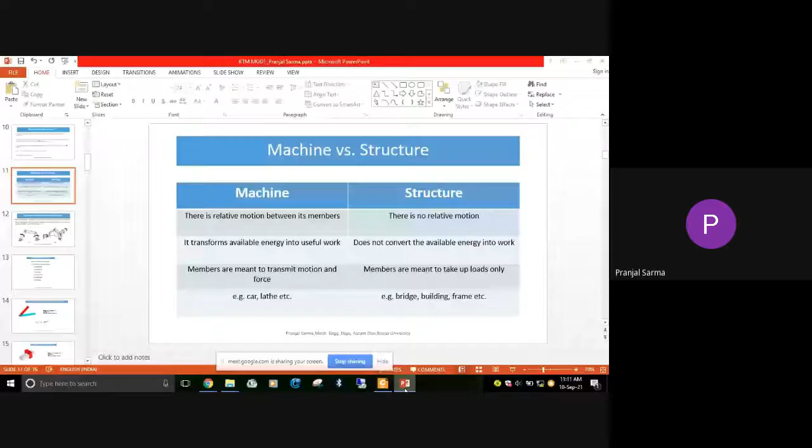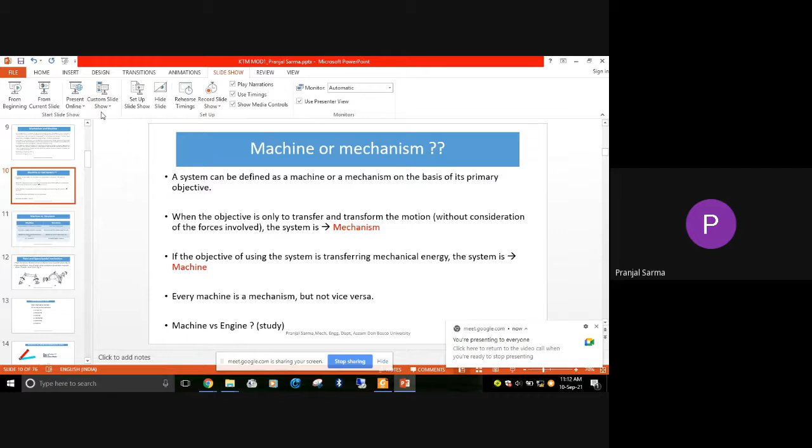So now after that we have also discussed mechanism and machine, and when we will be calling one as mechanism, when we will be designating one as machine. So those things we have discussed, and I told you to go through machine versus engine, and machine versus structure. I believe we have not discussed machine versus engine, so you can consider that as homework.

So now if we discuss machine versus structure, then what happens in the case of machine is there is a kind of relative motion between the members. Those members are what you can consider as links, and they are the main or elementary thing present in a machine, which is comprising of so many mechanisms. So between the members we have relative motion.

And if you consider a structure, in that case there is no relative motion between the members. For example, a structure like a building or bridge. So if you think of the building, this home etc., if the different members are having relative motion, that means it is kind of shaking. So then you can consider what is going to happen there - you will be afraid to stay there.

Similarly, if the bridge itself is kind of rocking, or has relative motion between different members, it will be disastrous. So that is it.

So this machine transforms available energy into certain kind of useful work - all of you already know this. So some motive power or available energy is there, and by the use of this machine we can get some useful work done through it.

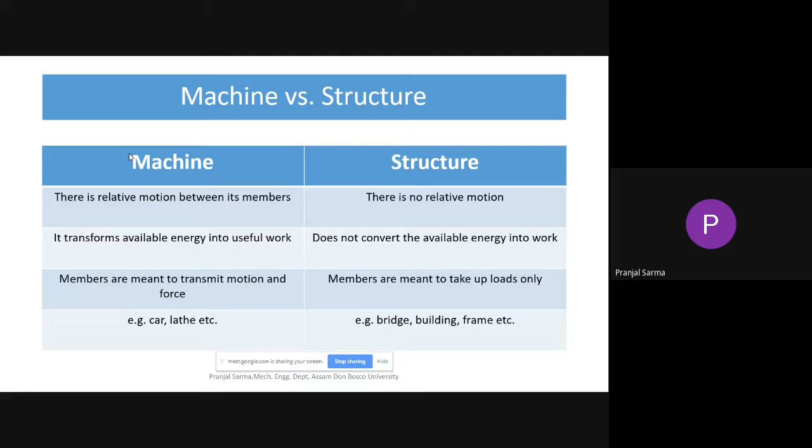As an example you can take machine - a car, or a machine tool like a lathe machine or milling, shaper etc., I consider as examples of machine. And different frames, buildings etc. you can consider as examples of structure.

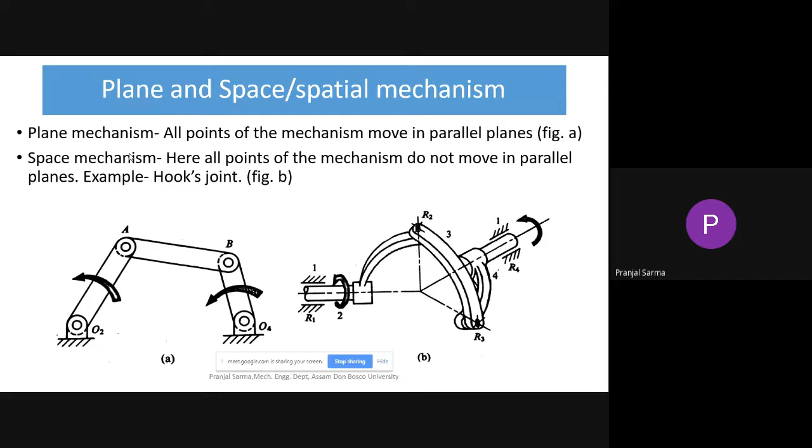So now prior to going to plane mechanism - what is plane mechanism or planar mechanism, or what is space or spatial mechanism - prior to that I'll go through some of the basics of the different terminology which we use while designating any kind of machine, mechanism, etc.

So now all of you by this time already know this mechanism. They are kind of the building blocks for the machine. The machine may comprise of a single or several mechanisms to get a certain useful work done.

And now in the case of mechanism, it is also comprising of so many linked members assembled in such a way that it can give certain relative motion, predictable or constant kind of relative motion between them. So there is a certain degree of freedom involved, and there will be different members linked, or joined together, so as to form that particular arrangement.

So now in that particular case we'll be discussing what is a link, also known as the kinematic link, or the same thing. Or you can say the different pair - what we understand as the pair. So those things we are going to discuss, starting with the initial thing.

So this link, also known as the kinematic link. This word kinematic is also involved sometimes.

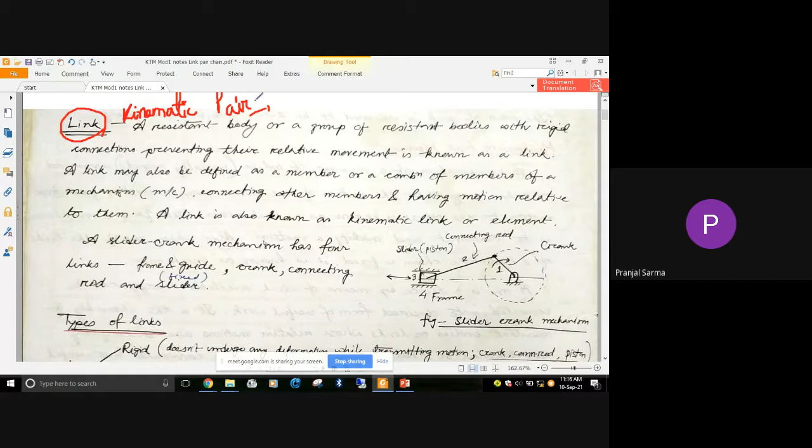Okay, don't worry. So link or kinematic link, then we have got pair. Then the next higher thing is kinematic chain. So they are all like the meaning is similar. Kinematic word if we use or don't use, then ultimately it means the kinematic link only, kinematic pair, kinematic chain only. Even though we only call as link, pair, chain.

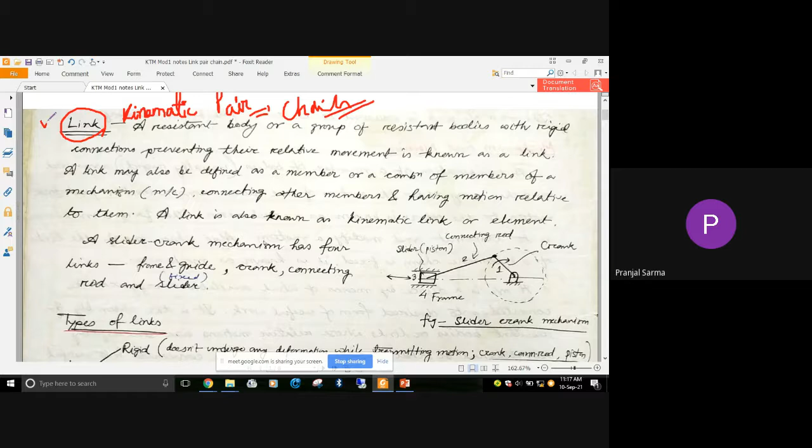So now this link, how can we define it? Basically, this link is a resistant body, or it can be a group of resistant bodies also with rigid connection which prevent their relative motion in between. If it is a group of resistant bodies, then there is no relative motion in between them. And it can also be defined as a member or a combination of members of a certain mechanism.

So you can consider this as the building block for it. And what does it do? It basically connects other members and having relative motion to them. So if we consider two links, it is kind of the members which is going to give you the ultimate thing. This link we also call as kinematic link or element. It is the basic thing that is there in this case.

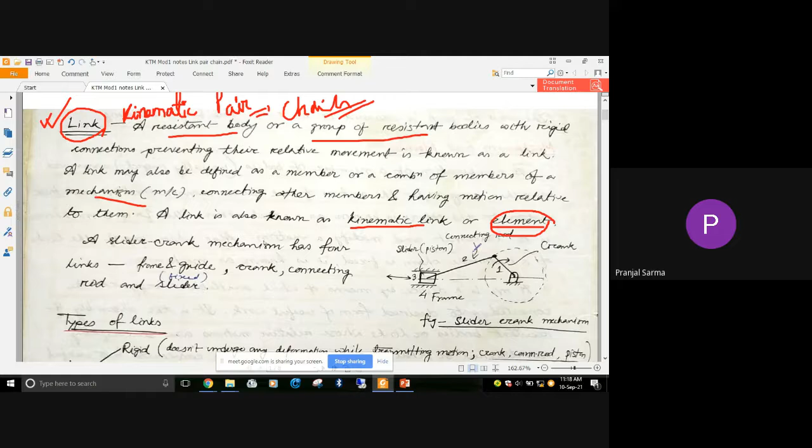So now there is one very important kind of mechanism known as the slider crank mechanism, which will be coming across quite often. With respect to this, I will be showing what are the different links which is there. Prior to going to the kinematic of this slider crank mechanism, I just want to tell you one thing. See, there will be so many mechanisms you will be coming across, and those different mechanisms will have different shape and size. But it can ultimately be broken down to some simple diagram, and those kind of line diagrams we call it as...

Hello, am I audible to all of you?

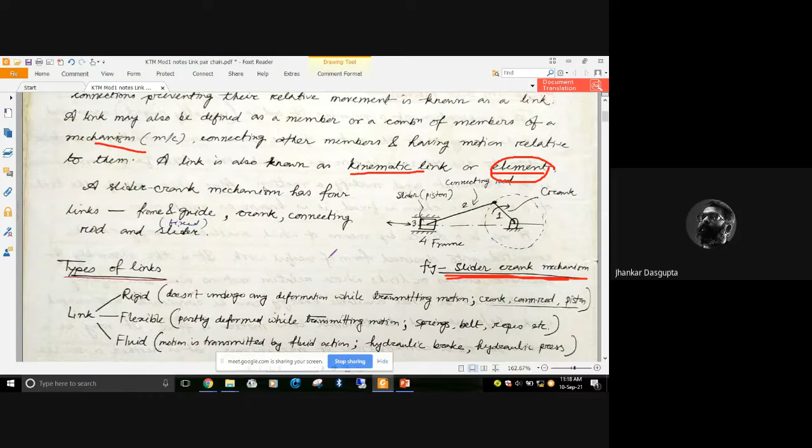Yes, sir. Okay, so those diagrams basically we call it as configuration diagram, or sometimes kinematic diagram also. Sorry, writing in laptop is kind of difficult. Configuration diagram, also known as kinematic diagram.

So what they do basically, those diagrams we use to represent the complex mechanism in a simple way. Now here in this particular case, whatever you have, you can see here in this right hand side. So this is the configuration diagram or kinematic diagram, sometimes even known as the line diagram. We don't generally use the word line diagram, but configuration diagram or kinematic diagram is the proper word to use.

This configuration diagram is for the slider crank mechanism. Here we have got four links, four basic elements. So what are those? We have got one link which is known as the crank. We have got this link number 2, which is known as the connecting rod. This connects this particular crank to this particular slider. So this connects it, and this particular link is the connecting rod.

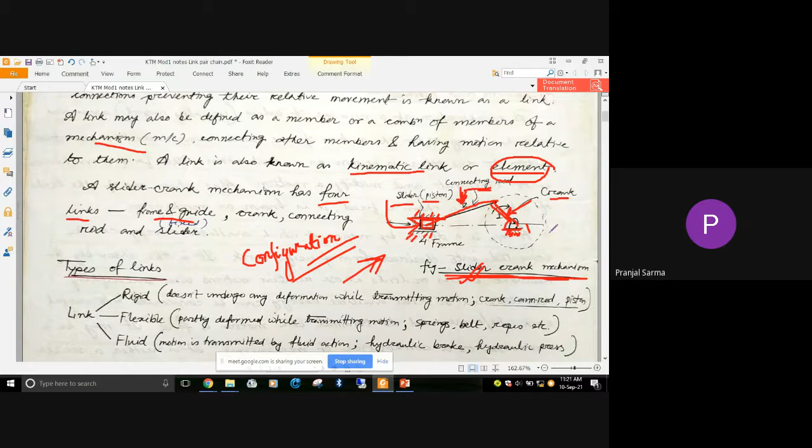So right now up to this much, it is clear what is link. Okay, so just you can respond, no problem.

Link is kind of the elementary thing, just like if you think of making a building, the bricks are the elementary thing. So just like in the case of mechanism, the links are the elementary thing. Now the types of links we can classify in different ways.

One category of classification may be categorizing them as rigid link, flexible link, or fluid link. So how can we define the rigid link? This rigid link will not undergo any kind of deformation while transmitting motion. As already discussed, a mechanism is used for transmitting motion or force from one place to another, that means from one link to another, so there will be certain input portion and certain output portion. If it is a rigid link, it is not going to undergo any kind of deformation while transmitting motion.

Like in the case of the slider crank mechanism as an example, the crank which was the rotating member, the connecting rod which was connecting the crank end to the slider, and similarly the piston, all those were kind of rigid links, so they will not undergo deformation in their shape.

Similarly we can have a flexible link which can undergo partial deformation while transmitting motion. Like if you consider the spring, maybe the belt or the ropes, during its operation the spring, belt, etc. may undergo certain partial deformation, so those will be considered flexible links.

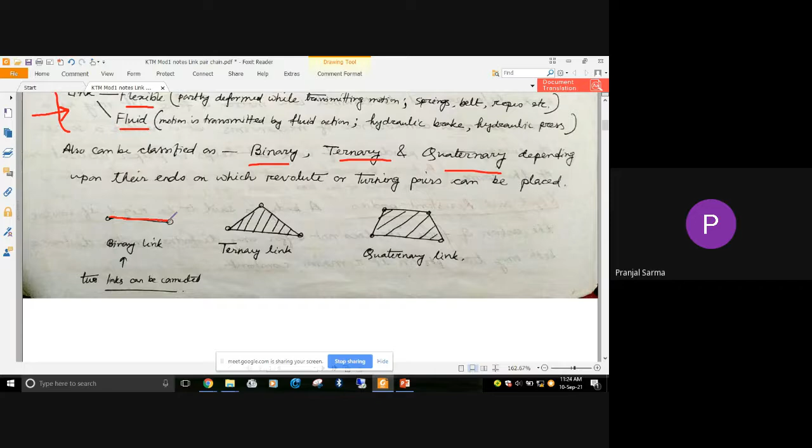Now how can we define binary, ternary, quaternary links? What will be a binary link? In simple terms you can draw it like this. It can have different shapes in actual sense, which I'll show later. This binary link basically has two ends where I can connect some other element, that's why the name is binary. We have got this end and this end where two other links can be connected.

If I join another link here, I can do that, and similarly I'll be able to join another link here also. So this particular link is a binary link. Similarly, if you consider this joint, for this particular link we have got one point here where I can join another link, and similarly one here, so that will be another binary link.

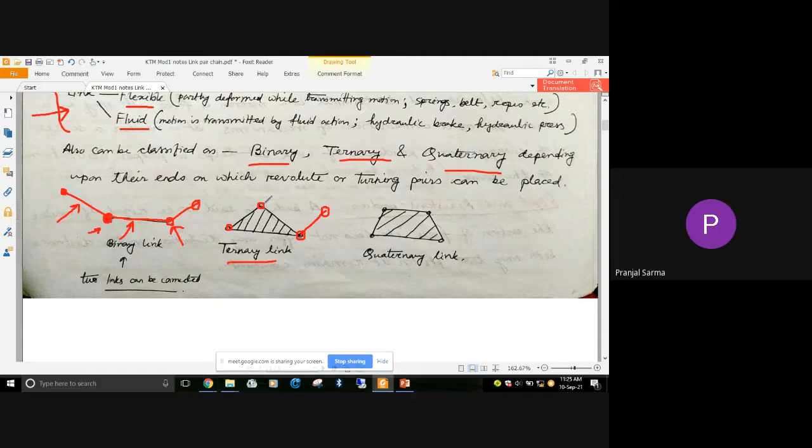Similarly we can have a ternary link. From the name itself we can know, so here I am showing by this circle, and at this point and similarly at this point we can connect some other member. It's possible that I may connect some other ternary, binary, or whatever type of link here. So ultimately there are 1, 2, and 3 possible positions where revolute or turning pairs can be placed.

Similarly, I can have a quaternary link, depending on having 1, 2, 3, 4 number of positions where other links can attach. Now, how can I know that this one is a ternary link or a quaternary link, but not 3 different binary links or 4 different binary links in this case?

How can I be sure? So generally, to designate a ternary or quaternary link, to make the sense that this whole thing is a single entity, we generally mark it by a hatch mark, like this. If I show it like this, automatically it is understood that this is a ternary link. So this one is a binary link.

How is it binary? We have got 2 positions, 2 ends where I can connect to other revolute pairs. Similarly, 3 possible positions for the ternary link. In this case, how many positions are there where turning or revolute pairs can be placed for this case?

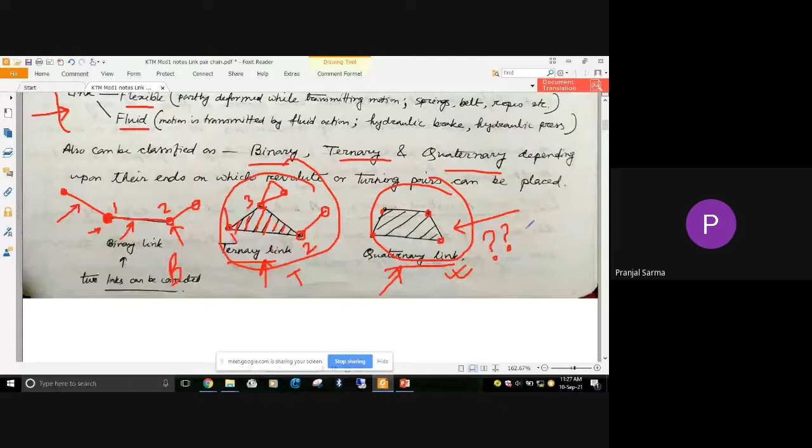Anyone? How many? Who will give me the answer? Don't be afraid to answer, just try. Hello, I hope I am audible.

Yes, sir, so what will be the answer for this quaternary link? How many possible positions are there where I can join other types of links, other pairs, other turning pairs? For this case, we have 1, 2, 3 and 4. Yes, correct, 4.

4 positions. So, to make the sense that it is a single entity, not 4 different binary links, someone may think, okay, I am drawing like this, and because of that it should be like we showed previously in the case of binary. Yes, we drew like this, right, the binary one.

So you should not think that suppose this is 4 different links, suppose 1, 2, 3 and 4. You should not think this is 4 different links that are there. But to make things clear, that it is a single entity, we do this, we show it with hatch marking.

So while drawing configuration diagrams, these are diagrams drawn in simple form, used to describe or draw whatever is the type of mechanism in its simple pictorial way. So while drawing the configuration diagram, if some of the links are shown with hatch marks, then you must understand that this is a single link, not 4 different binary links, but a single link.

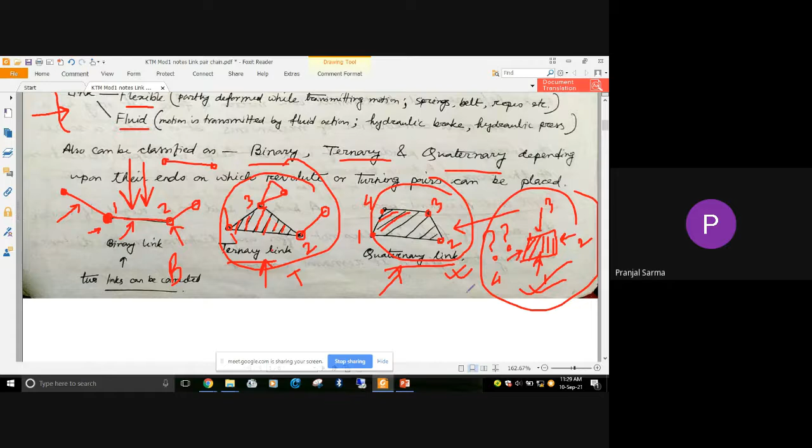Understood up to this much? Is it clear? Let me know. If you people respond, then it will be easy for me to go ahead.

Okay, thank you. So next is pair. Now link is done, now the next higher thing is pair. With this pair, we are not talking about whatever pair you people like, we are not talking about couple and all. The meaning is something like, from pair all of you understand that 2 things are there.

So now this kinematic pair we can define as a joint of 2 links, and they are having relative motion between them. Whenever 2 links are joined at the joint, we have already seen that in the links, at the end of the links, it's possible to join some other links. So this pair means join of 2 links and they must have relative motion between them.

It's not like, suppose if you think this is one link, let's consider link 1, and if I join here another link 2, and they have got motion relative to each other, relative motion is there, then it's a pair.

But suppose this is a link, consider, and this one, and I have actually welded here. Welding is being done here. Then do you think there will be any relative motion between them? Will it be able to move with respect to each other, this portion and this portion? I have welded here, I have done welding.

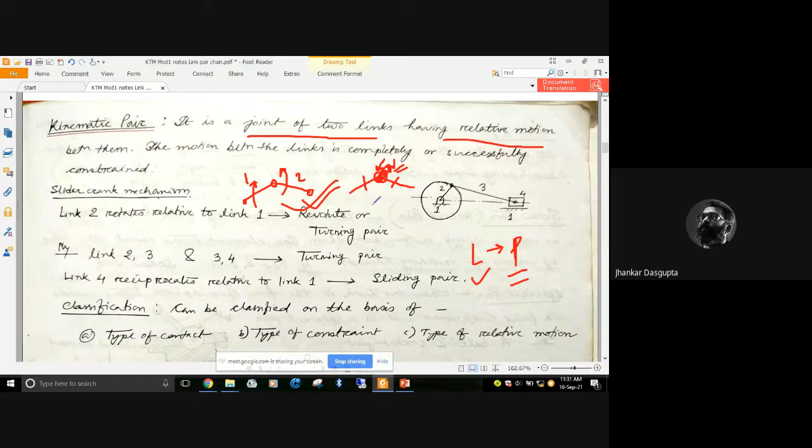What do you think? Will it be a kinematic pair? Shankar, what do you think? Thinking? Huh? Yes, will it be a kinematic pair in this case if I have welded here?

So now in that case it will not be a pair, but it will behave like a single link. Not correct, no, yes correct. So it will not be a kind of pair, because there is no relative motion possible between this part and this part, which is the case here. But it will be behaving like a single link. Now at this end and maybe at this end, it will be possible to join them.

So now it has to be joining of two links having relative motion between them, and in general the motion between the links is completely constrained. The constrained type of motion we'll discuss later, don't worry. So now, coming back, what is the name of this mechanism that we have previously drawn?

What is the name of this mechanism we have discussed? This is the configuration diagram. Previously we showed it on the left hand side, now the slider is on the right hand side. So this is the slider crank mechanism, if you can remember the name.

There are 4 links. Link number 1 is the fixed link or the guide, shown here as well as here. Link number 2, which can rotate and make a complete revolution, is known as the crank. Link number 3 connects the crank and the slider, and the slider itself is link number 4. So there are 4 links.

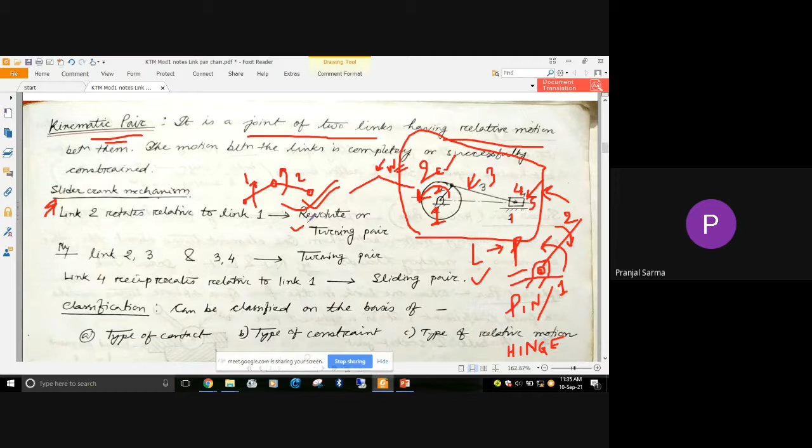So what kind of relative motion is possible between them? About this pin, it can rotate either this way or that way. So this fixed link number 1 and link number 2 in the slider crank mechanism, link 2 can rotate relative to link 1. This constitutes a kinematic pair known as revolute or turning pair, depending on the type of movement possible.

Similarly, if you consider link 2 and link 3, there is again a pin or hinge joint, and generally a pin or hinge joint allows for this kind of turning or revolute movement, so once again that is a turning pair. Similarly, link 3's end is connected to slider 4 with a pin joint, and this again makes another turning pair. So we have discussed 3 turning pairs.

Now consider link 4 with respect to link 1 - let's look at this right hand side portion. This is the slider. From the name itself, the slider slides along this guide, so the relative motion is a sliding kind of movement, giving you a sliding pair. Understood up to this much?

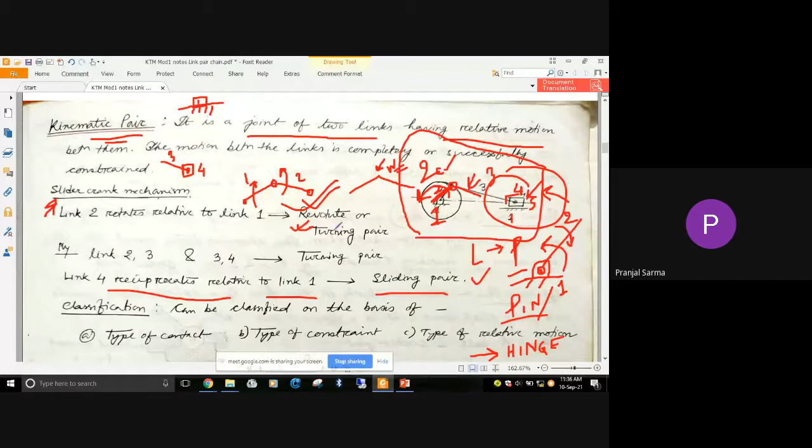Yes, sir. Okay. Yes.

Now I am going to show you a slider crank mechanism, how basically it is working. Maybe any kind of motion, let's consider I am just showing this particular one.

So how many links are there? As I have said, the actual loop of the mechanism may be different, but what we draw in a simple form is known as the configuration diagram. So here in this particular video, I'll just run it.

How many links are there in the slider crank mechanism? Four. What are they? We have got the crank, which can rotate. At the end of this crank we connect it to the slider, so that is another link. Then the slider itself is another link, and it is guided on a particular guide, meaning the slider can only have reciprocating or to-and-fro movement along that slope.

It is being guided here; there is no other way it will be able to move. So I am just showing it.

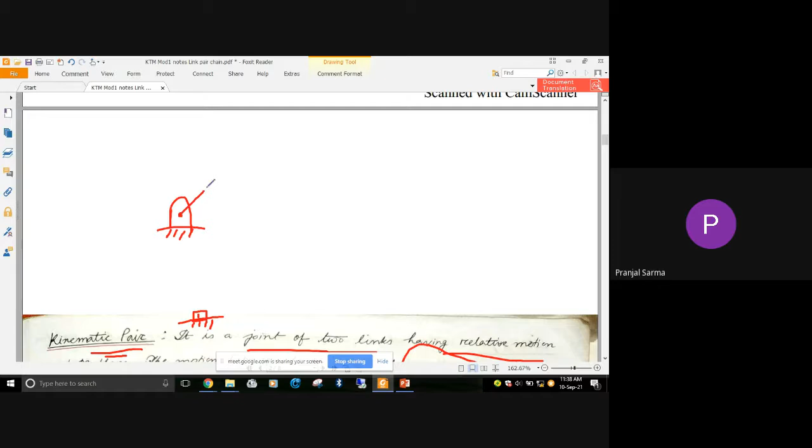This is the fixed portion, and in this particular case there is no movement here, it is fixed, this particular blue thing, and it is rotating like this. It is able to make a complete revolution, right?

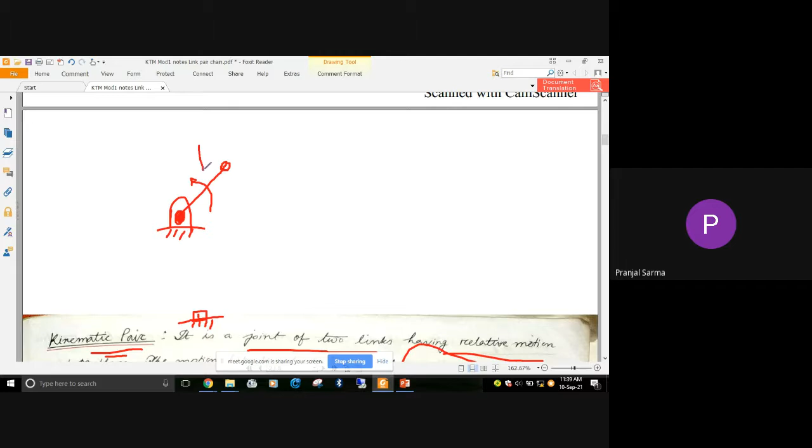So now, what have I shown up to this point. This can rotate about this particular pin joint, as it is a pin joint it can rotate. So now this end of this particular crank, this is known as the crank, this is the fixed portion. Now it is connecting the slider to the crank, this is the connecting rod.

And this is the slider, from the name itself you can say it will have sliding movement when this crank is being rotated, because motion transfer takes place. And why motion transfer is taking place, because these are connected.

So had it been like one link like this, and there is no connection between them, suppose this is the crank, and there is no connection between the crank and this particular connecting rod, do you think there will be any kind of motion that is possible?

It is not connected, that means no connection is there, so it will behave like two independent entities. Even if you give some motion to it, it will not be transferred. So through this, as they are making the kinematic pair, their relative motion is being connected and transferred.

Now if you consider this particular slider, if we don't guide it, if I don't provide any kind of guidance to it, I cannot be sure what it is going to behave like. So now this guide actually makes the motion constrained, that means because of this particular guide, it will be constrained or limited to move along this direction only.

So this is the configuration diagram that we are drawing, but actually it may look something like this. Now I am once again showing it.

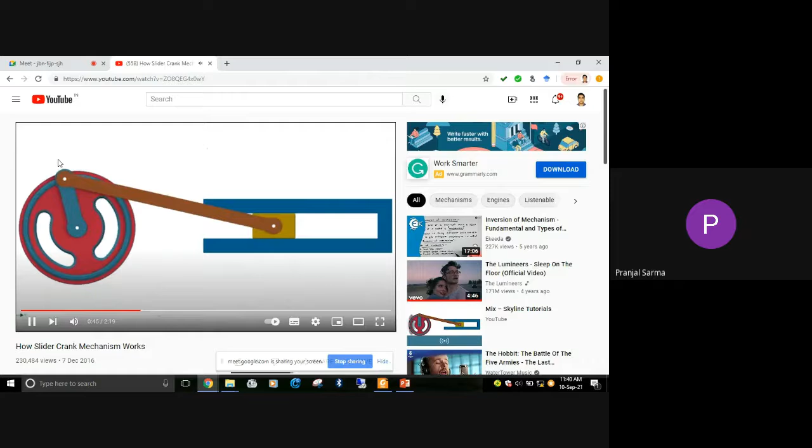Now you can see here this link, with respect to this portion, it is turning, so this is a turning pair - this blue portion and this brown portion - because of this particular white thing, that is the pin or hinge joint. Here also it will have rotation with respect to itself, turning with respect to this link and this.

Similarly, if you consider this brown portion and the slider portion, once again there is one hinge joint, and during the course of movement of this particular blue crank, some turning motion is there. So this and this is once again making a turning pair.

Now if you think of this slider and this blue portion that is the guide, along this particular direction only, a to and fro kind of movement is there, so the slider is sliding, the crank is having rotational motion, and the motion from the crank is being transferred to the slider through this particular connecting rod, which connects them. The slider is being guided by this particular guide or the frame, so it cannot move vertically, only in this direction it is permitted to move. So this is a kind of constrained motion, understood up to this much.

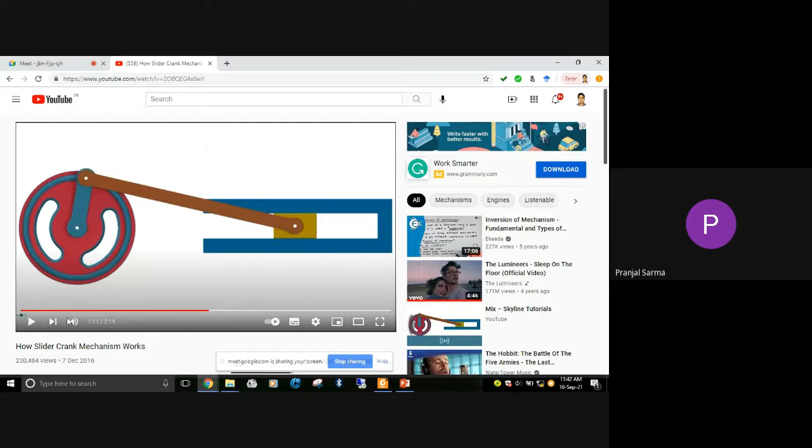So what are the applications of this? This particular slider crank mechanism has got so many applications in different scenarios.

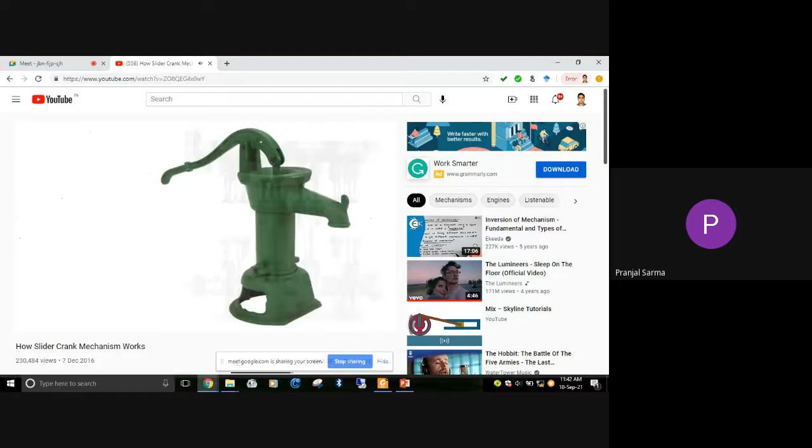All of you already know, all of you might have seen any kind of car. Whatever is the basic mechanism there, you might have heard about piston cylinder, and in basic thermodynamics, that piston cylinder is ultimately nothing but the inherent mechanism of the slider crank mechanism. Rotating movement of the crank has been transferred, giving the up and down movement to the piston in the cylinder.

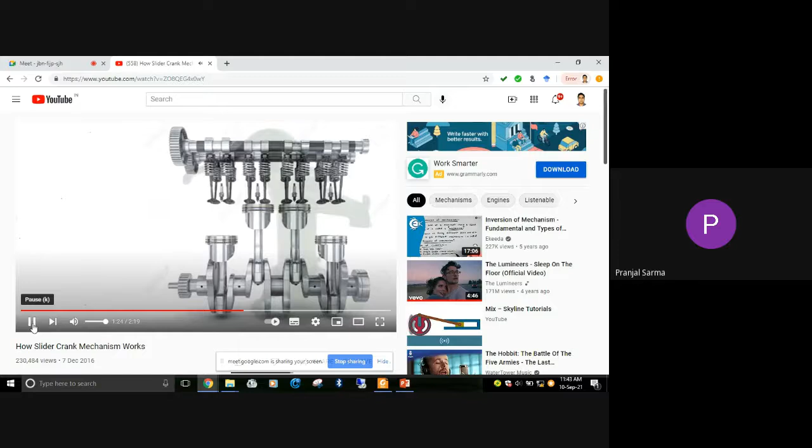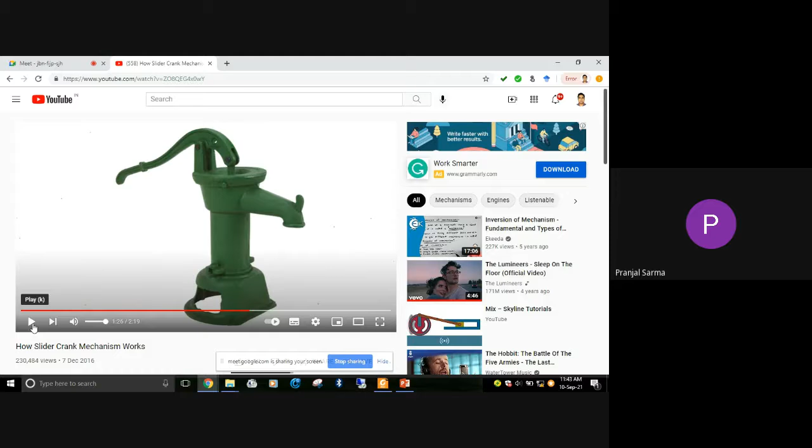So there are some words we will use later, like inversion of mechanism. This main mechanism, the slider crank mechanism, in some form with certain modifications, will have different applications and give rise to different kinds of mechanisms. For example, even in a hand pump there is one inversion being used. Similarly there are some others.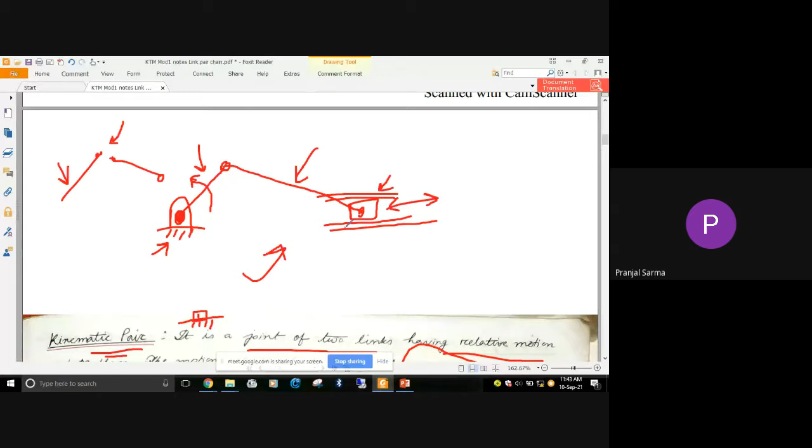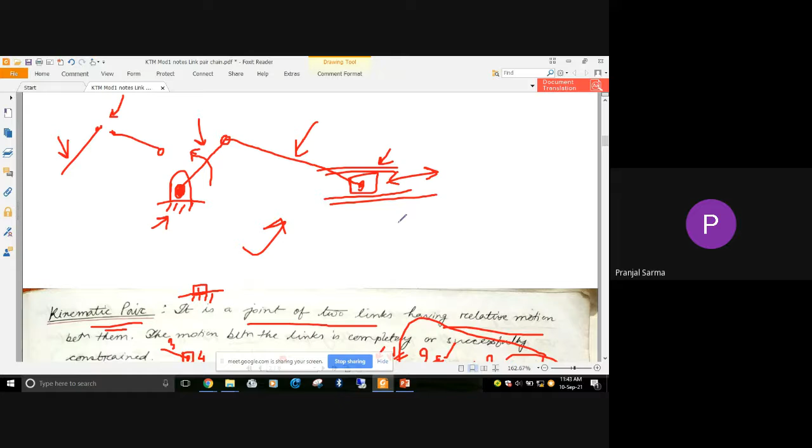So up to this much, any confusion? Have all of you understood how this slider crank mechanism basically works? Let me know - this is very important in your day-to-day life and engineering applications, you will always be coming across this very basic yet powerful mechanism. Let me know, have you understood or not? Yes. What others? Yes, sir. Okay. Now if someone asks you about the slider crank mechanism, you have got the confidence to make people understand, right?

Now why do we generally show this portion with, sometimes you will see, circles drawn along the crank? This basically shows the locus of the end point of the crank, this particular point. So if it rotates and makes a complete revolution, ultimately this will move in this particular circle.

That's why we show it like this. And we have to show motion to the slider, that is reciprocating, to and fro kind of motion. Now how many links are there?

This is also a fixed link, that is number one. Similarly this frame is also kind of fixed. If you show it like this with this hatching, we automatically understand that this is fixed - in the configuration diagram we show the fixed link like this. Fixed links are always numbered with the same number. Later on I will discuss why it is numbered the same, not different numbers. So this is the whole thing.

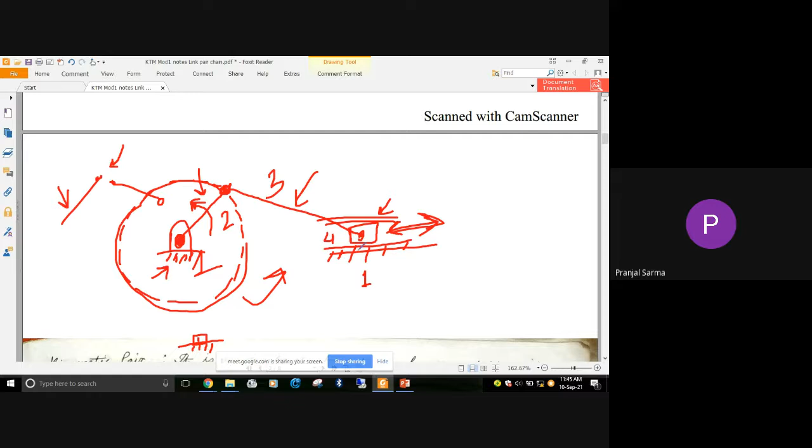So the next link is this one. You can go from this side or that side, there is no hard and fast rule about that, but in general we start from the slider. Second one is crank, third link is this connecting rod, and fourth link is basically this slider. And this guide or frame is once again fixed. These are the four links.

Now there can be different classifications of the kinematic chain, this pair also. It can be classified based on the type of contact - what kind of contact is there between the two links making the kinematic pair. Similarly, type of constraint - how basically it is being held, something like that. And the type of relative motion - because of this particular type of joint, what kind of relative motion it is permitting.

Based on the type of contact, we have got lower pair and higher pair. Depending on contact, it is either area or surface contact - that is known as lower pair. What is higher pair? If the two links have either line or point type of contact, that means only at the connection between the two links giving rise to the pair, if it is line or point type of contact, then this type of pair is known as the higher pair. But if it has surface contact, where throughout the surface or a certain portion of the area is in contact, then it is lower pair.

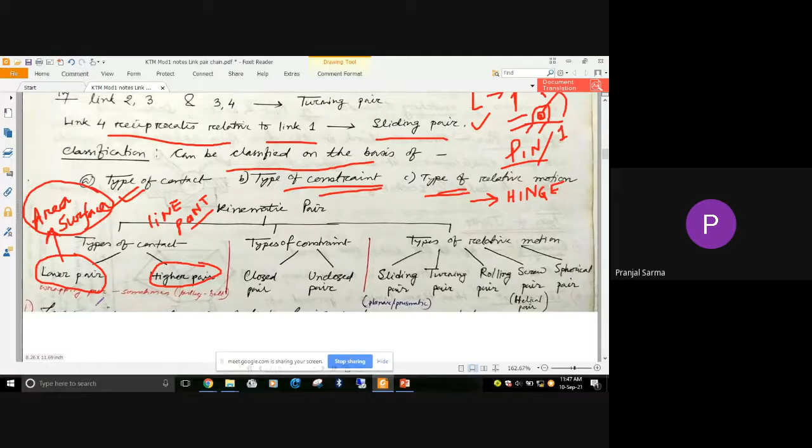In general, based on type of contact, we call it higher pair and lower pair. Now based on the type of constraint, we have closed pair or unclosed pair - that is how they are held together, whether mechanically closed or unclosed formation.

Mind you, it is not constant - just like the universal gas constant or other terms, the word is not constant but constraint. CONSTRAIN, okay, not a constant, as generally used in mathematics. It's not constant but constraint.

Similarly, depending on the type of relative motion - due to the connection between the two links forming the kinematic pair, what kind of motion it is permitting - based on that, we have got a sliding pair. Just like in the slider crank mechanism, we have seen the slider with respect to the guide, what kind of movement it has got.

That is sliding, or to and fro kind of motion it was having - that is nothing but a kind of sliding motion. So that kind of example falls under the sliding pair.

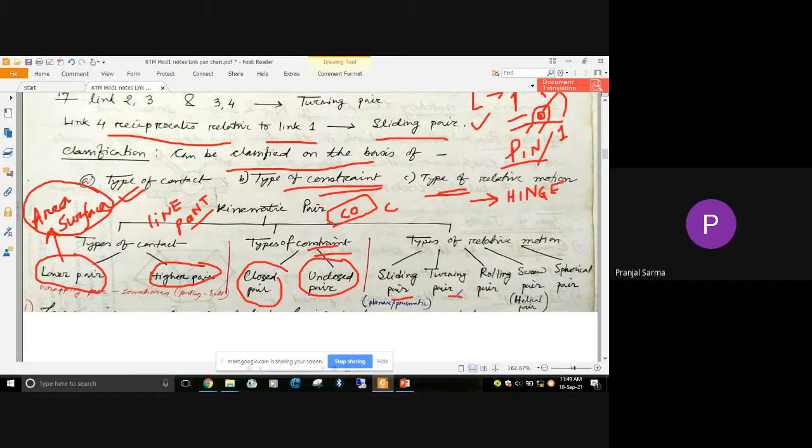Similarly, we have also seen the hinge joint or pin joint - they give rise to turning kind of movement between the two links, so that kind of pair is known as the turning pair. Similarly, there is rolling motion also possible between two elements, so that kind of pair is called rolling pair.

Similarly, if you consider the example of screw and nut - whatever motion, I believe all of you have used a screwdriver maybe at home or in the workshop - you might have seen how the movement is helical kind of movement. So that kind of motion between two links is known as the screw pair, or also sometimes helical pair.

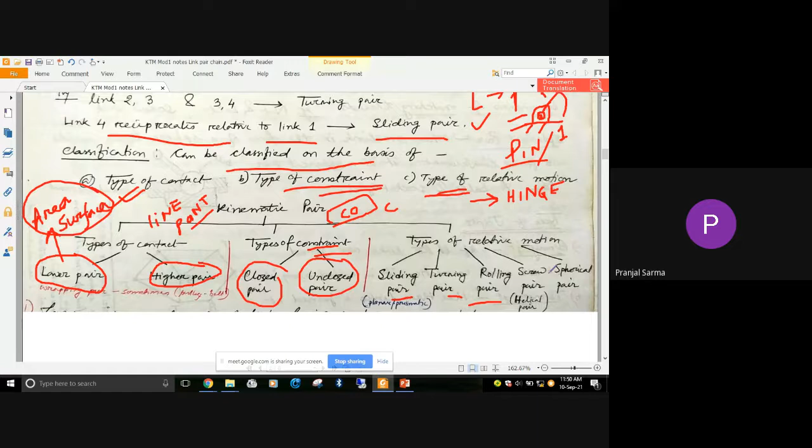And also, those who play video games have seen the joystick - whatever joystick motion is there, you can give it in different directions, right? There is a spherical ball at the end, or socket joint that is there. So that example falls under the spherical pair. These are the categories you have understood.

Let me know - yes or no? Yes, sir.

Okay, thank you. So now coming to the definition of lower pair and higher pair, already I have told - a pair or link having surface or area contact between the members is called lower pair. Generally the contact surface of the two links are similar. This is important. An example you can consider is maybe a nut turning on a screw, which has got surface contact.

Similarly, if you consider a piston and cylinder arrangement, when the piston is reciprocating up and down or to and fro inside the cylinder, the contact between the outer surface of the piston and the inner surface of the cylinder is also a kind of area or surface contact. So they will make a lower pair.

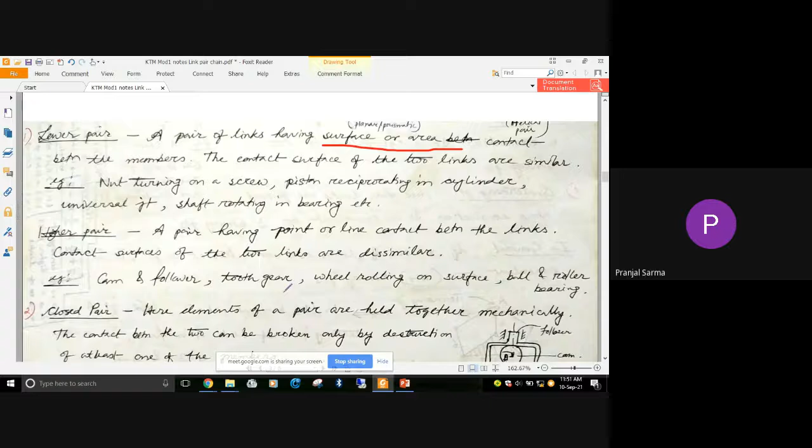Similarly, later on we'll be discussing the universal joint, which also falls under lower pair. Similarly, higher pair, as I have already told, is point or line contact between the links. You can consider the cam follower, or gear etc. - those fall under the example of higher pair.

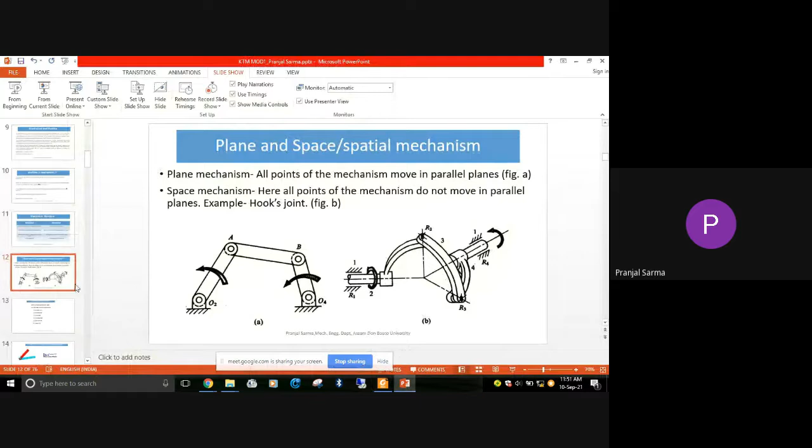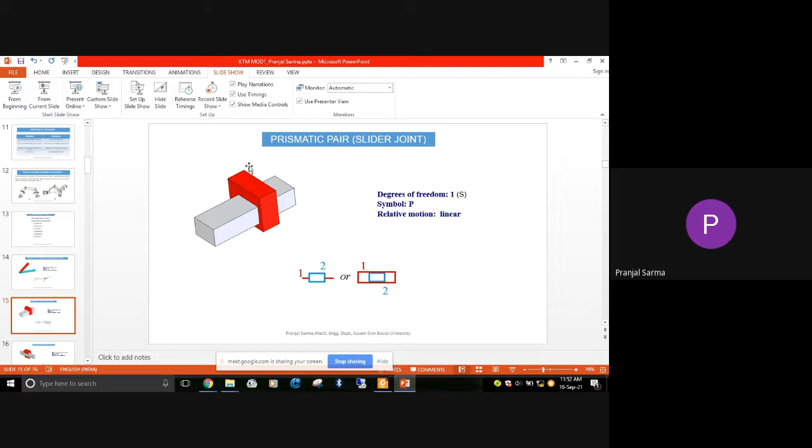That rectangular bar is there along the rectangular hole, so only in this direction it can have a to and fro kind of motion. This is once again a type of constrained motion, but the type of motion here is sliding. So this is the sliding kind of pair, and if you consider it with respect to joint, this is kind of slider joint.

Now think of the helical pair or screw pair. All of you already know the screw and nut combination, the helical groove. It can be right-handed or left-handed depending on how the threads are cut. If clockwise rotation gives you forward insertion, it's right-handed, otherwise left-handed, if anticlockwise rotation gives forward movement. I believe you already know these things. So this is the screw pair or helical pair.

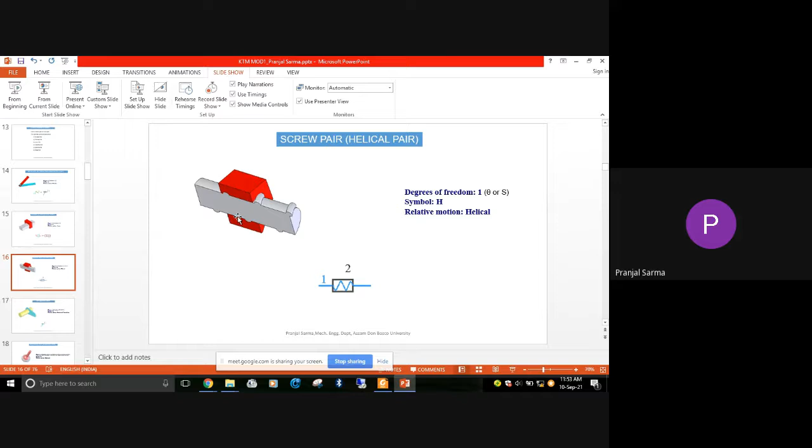Similarly, the spherical pair, also known sometimes as globular pair. What kind of movement can it have? Three types of degree of freedom it can have, so in all directions, this way, that way, that way, you can give the motion.

Similarly, you can have a planar pair or flat pair. If it's sliding motion only, it's specifically called planar or flat kind of pair. If one contacting surface is sliding over another, and both of them are planar, then I can also call this planar pair or flat pair.

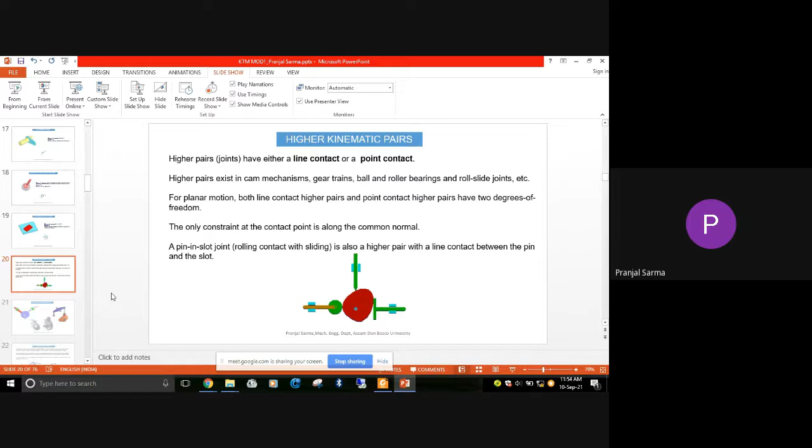So I told you I am going to show you some example of higher kinematic pair. Here it is surface contact or line contact, if you consider these two flat pair. If blue is suppose link 1, and the red portion is link 2, what kind of contact do they have?

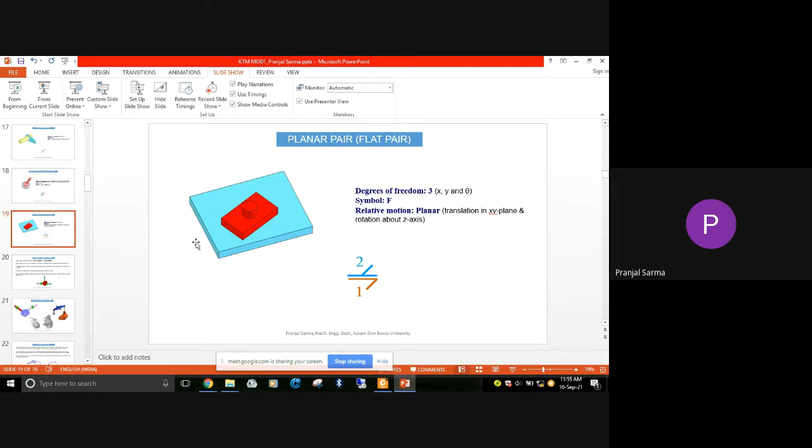Throughout the surface they have contact, or only at a line or point? Who can tell me? So throughout the surface they have contact, right? So that kind of contact will fall under surface or area contact. Will it fall under lower pair or higher pair? It will fall under lower pair, not higher. Lower pair means area or surface contact, higher pair means line or point contact. Here surface or area contact is there, so it falls under lower pair.

Similarly, if we discuss this pin joint, is it making a higher pair or lower pair? Who can tell me? Is it surface or point contact, or line type of contact, or does it have surface contact throughout? First check whether it is surface or area contact, or line or point contact. What type of contact is it?

Point contact, sir. Point, or here it is the connection, okay? It is being embraced throughout, you can say. So surface or line now? Surface or point? Point, sir.

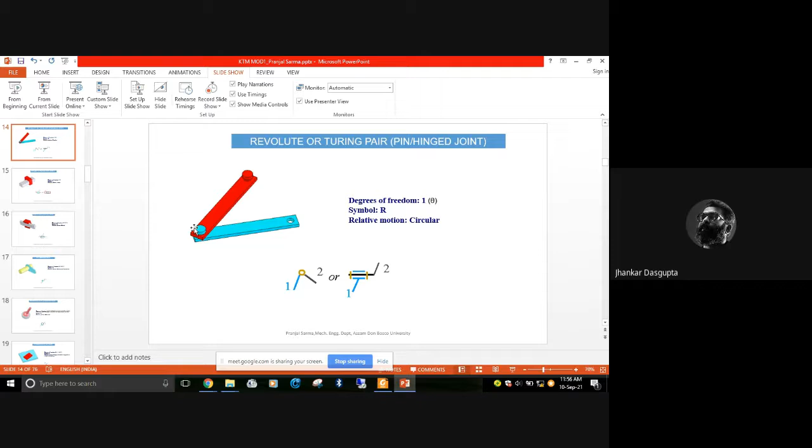Why point? In actual sense, don't think of it as just the word pin. The actual look is something being inserted and wrapped around there. So is it the surface that is in contact, or a point? Let's consider this: the point is in contact, only point, it is being wrapped around, you consider like that.

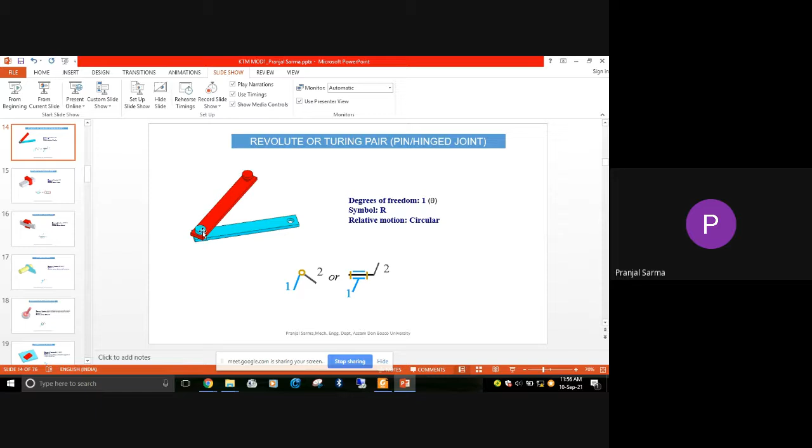Yes, then it will become surface, right? Throughout, if you consider the blue portion and its thickness, I am just zooming it so you can see. Now throughout it, the red portion also has certain thickness, and when it is inserted there in this particular bulging outward kind of thing, the hole was there just like in this case. So in this red portion there was also a hole, and that is inserted there. Now tell me, was it the whole surface wrapped around that is in contact, or just some point that is in contact?

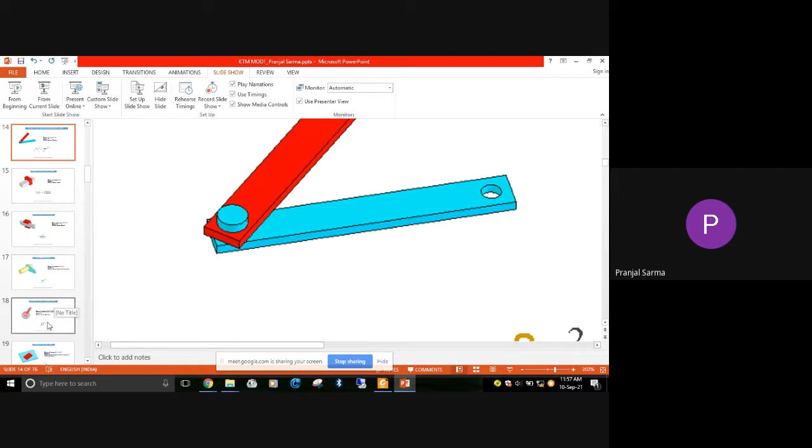So the whole surface is in contact. Surface or area contact makes it a lower pair, okay.

And if it is point or line contact, then it makes a higher pair. Some examples of higher pair: gearing, the normal gear you see, spur gear, etc. Similarly cam and follower, those are having contact that is either line or point kind, so they form a higher kinematic pair. So you can see how it is a higher pair.

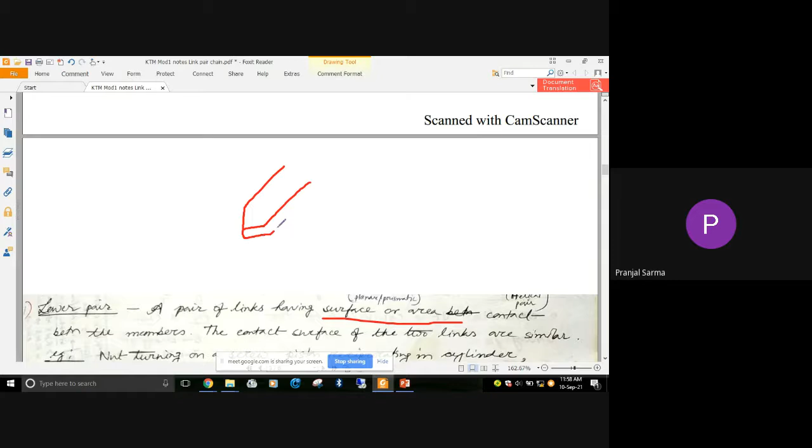If you think of this portion, suppose let's consider this - this is actually the cam, this is the follower. Here it is exaggerated, two followers are generally shown; later on we'll discuss in details. But if you think of this portion, this portion is one view, like this. If you think of it in 3D view, it will be something like this.

So now this portion is in contact with, suppose, the outer portion of the cam, and it has also got certain thickness. Now here it is making, or another view if I draw, it will be something like this.

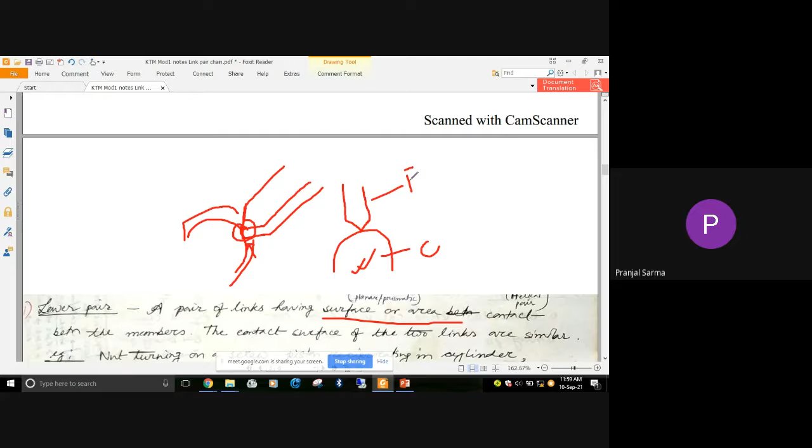Now from this view, is it point contact, line contact, or surface contact? If this is the cam, let's consider this to be the follower. There the contact is here, right? The contact is somewhere here. So now if you think like this, does it look like line, point, or surface contact?

Anyone? What does it look like? Line, sir - yes, from the look only, correct answer will ultimately be line. But just from this particular view it looks like a point. Now if you consider the whole thickness of it, ultimately the line, throughout the thickness, then it becomes line contact.

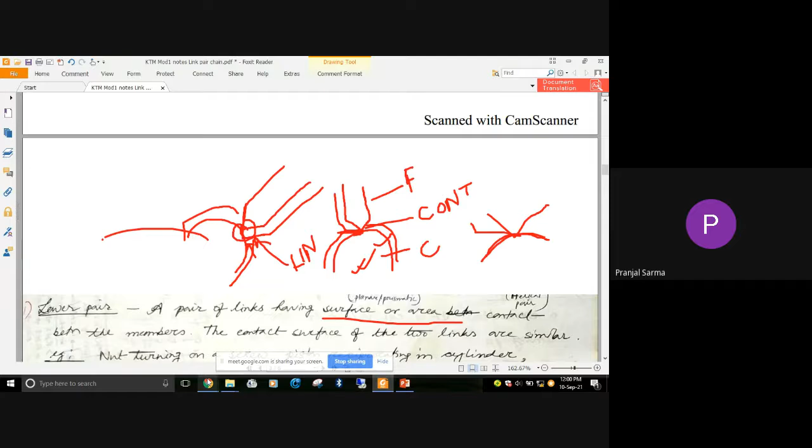Yes, this point is the kind of point contact. Now if I consider the whole thickness along which the contact is there, in that case it will be kind of line. So line contact means higher pair or lower pair? Higher, sir - correct, higher pair.

Similarly is the case in this gear example. The two teeth - I believe this is one tooth from the mating gear, and this is another gear, bigger and smaller. So wherever there is contact, actually only along the pitch line it has got the contact. So that also generally makes it line contact kind of thing only, so this is also an example of higher pair.

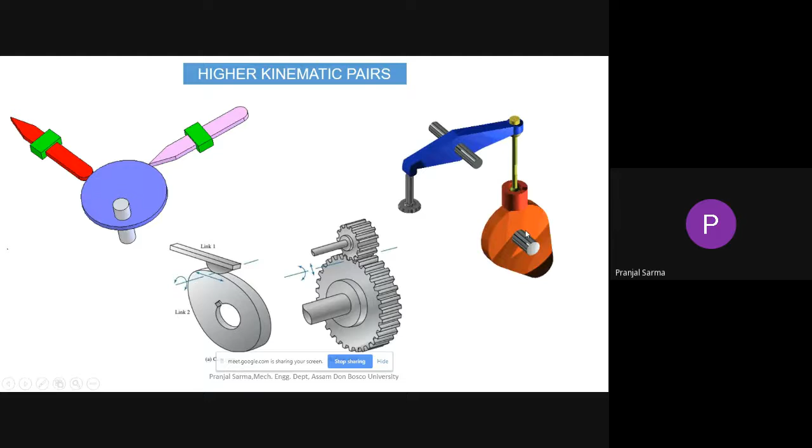Similarly, here I am showing once again the example of cam and follower which is used in the operation of a particular valve. Consider the opening and closing of different valves in an IC engine - we use cam and follower for that. So with the help of this motion, the motion is transmitted to this follower portion, then the rocker arm moves and the valve is operated. So those details of how cam and follower operate we'll discuss in the next classes.

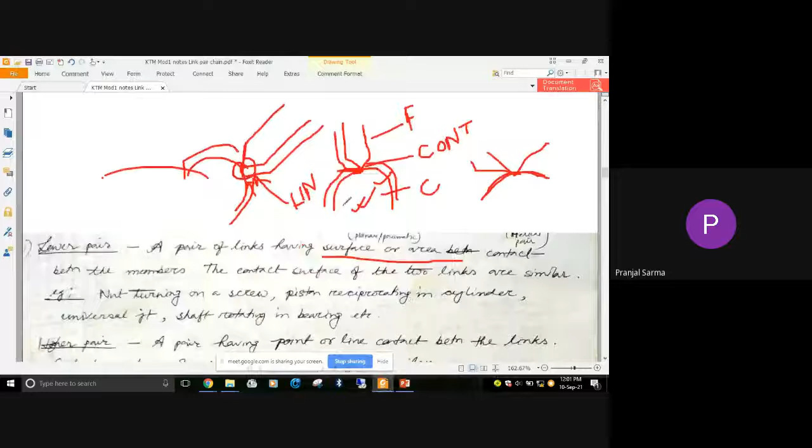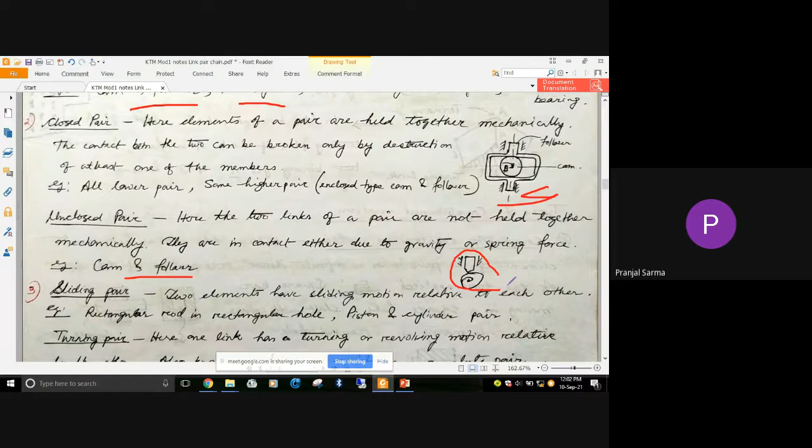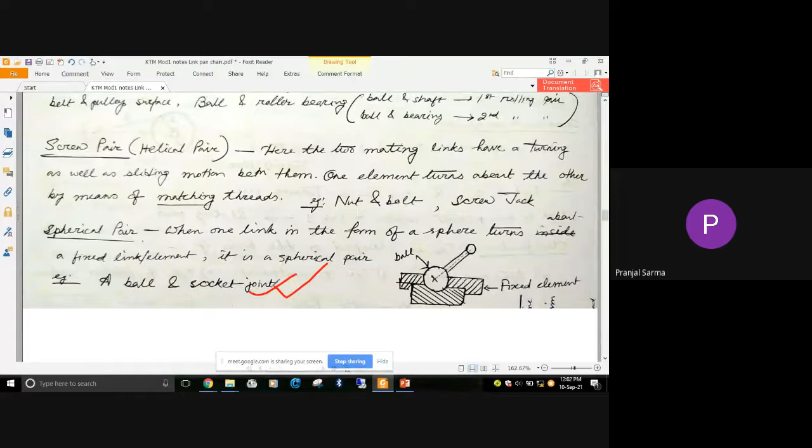So for today we'll stop up to this class. These things already we have discussed: closed pair - here the elements of a pair are held together mechanically, like in this case, all lower pair, some higher pair, etc. Similarly unclosed pair - cam and follower, the open type cam and follower you can consider like the unclosed pair. Similarly sliding pair, turning pair already we have discussed. Rolling pair - these things happen because of the type of motion only. So with this we'll stop here for today.